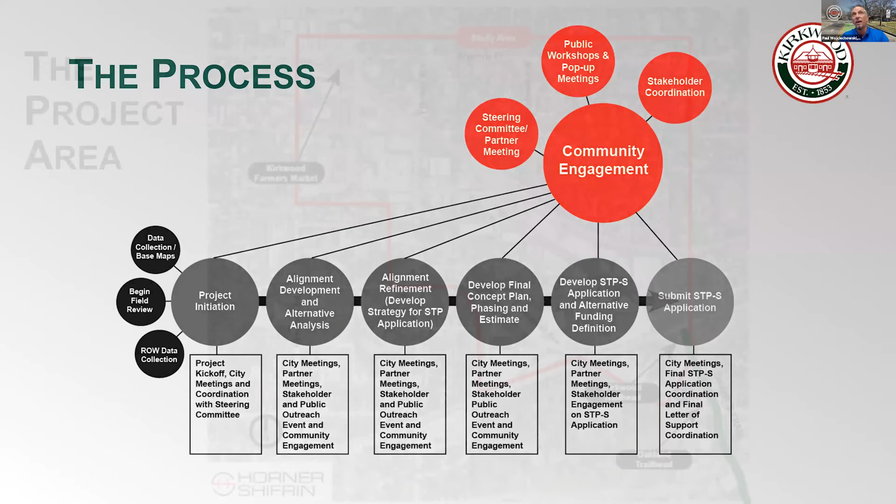So the project area is an area of influence, and it's a pretty big area. It goes all the way up just a little north of Argonne, and you'll see this on the map tool when you open it. I encourage you to leave your comments there—it's really easy to use.

As you can see, it's a little wider down by the Kirkwood Trailhead, and then it funnels into downtown Kirkwood, the farmers market, and the train station. So there are a lot of choices through this study area. We showed it big enough to show all the possible areas and allow people to comment.

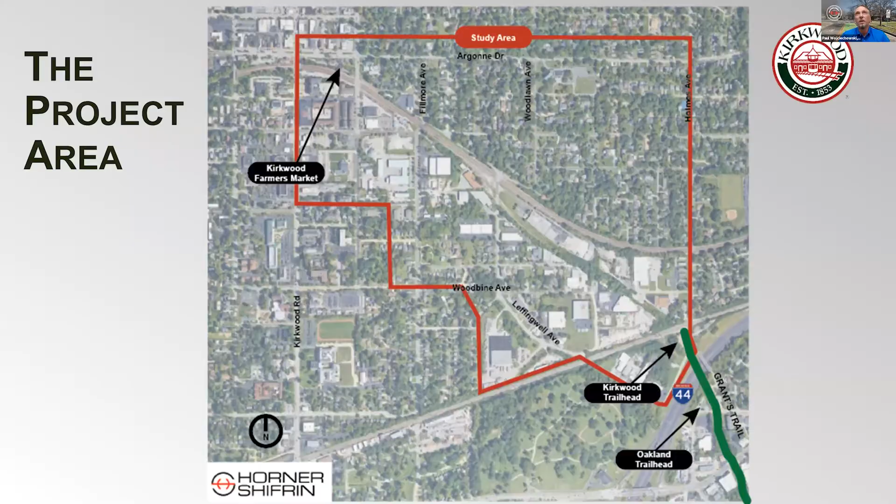So there are several challenges in this project: crossing two railroads. The Burlington Northern Railroad is on the southern end, right at the Kirkwood Trailhead. The railroad up by the train station and farmers market is the Union Pacific Railroad. Those are two challenging aspects.

Creating a plan that's of high quality in a constrained space to provide really good connectivity, a safe environment for all users, and really support economic enhancement in the city of Kirkwood. Funding the improvements is also a challenge, and it's an opportunity.

We're going to incorporate application considerations in the plan. So we're looking at that application when we're analyzing things and collecting information, to make sure that when we go to the funding stage, we've got our i's dotted and t's crossed to provide a really good application. Thinking about that now sets us up really well, but it is a challenge.

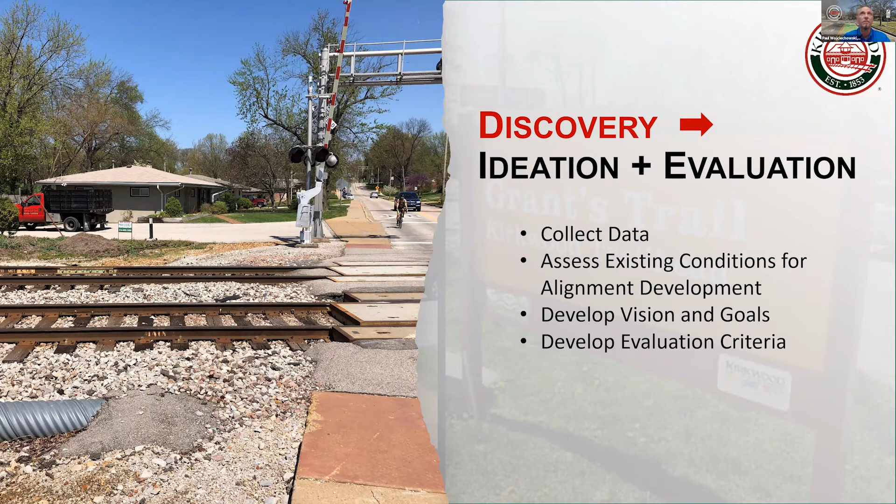Existing conditions: average daily traffic is important at intersections. When we develop a trail alignment, we want to make sure it's not just the segments that are nice to ride on - we want to make sure that when people cross intersections, it's safe and secure for an all ages and abilities approach. This map shows in purple roadways with under 3,000 cars a day, and in green roadways above 3,000 cars a day. We use that cutoff to know which streets carry enough traffic that we need to watch the crossings on.

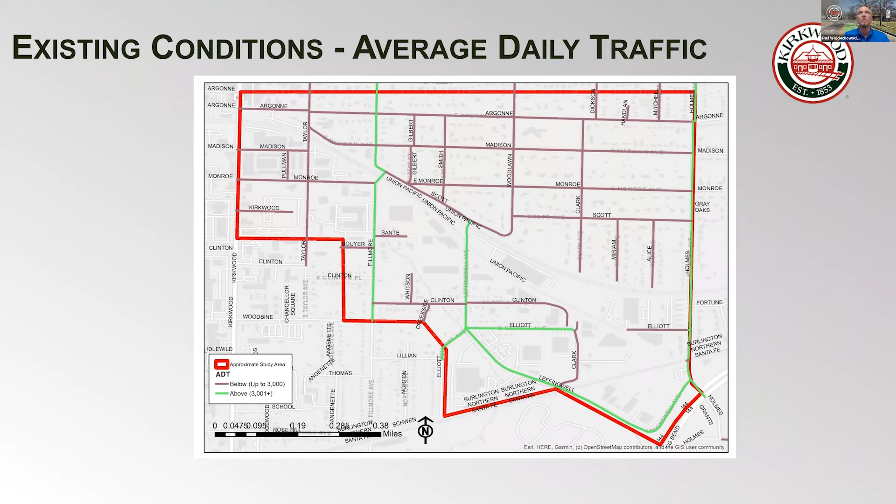Topography is important too. Of course, a rail line is built on a pretty minimal grade for the trains, but there are other parts we'll have to be concerned with. One of the goals we've established is to make sure the grades are appropriate for all ages and abilities, so we're going to look at the grades of the path or the alternative we come up with.

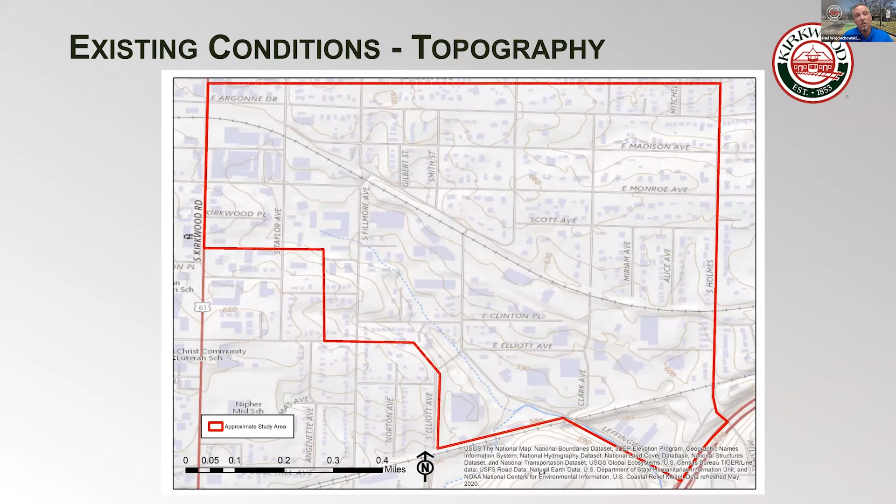Property ownership - the yellow areas on this map are railroad-owned properties, some active, some not so active. The city properties are in blue. One of the key things is to use as much public right-of-way as possible. The railroad rights-of-way are definitely a challenge - I'm not going to shy away from that - but we need to know where they are and how wide they are, because they're actually wider than most people think, and I've talked about that quite a bit with property owners over the last couple of weeks. So we're going to try to use as much public right-of-way as possible to make it cost-effective and minimize impacts.

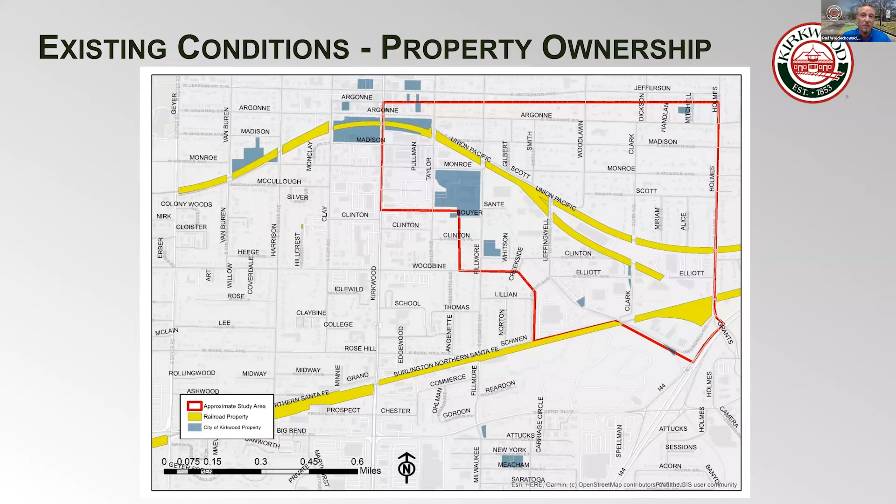We looked at crashes, much like your Vision Zero initiative. Knowing where those crashes are is really important. This map shows specifically in the study area bicycle and pedestrian involved crashes between 2011 and 2021, the last 10 years. We've got a couple of hotspots, Elliott and Leffingwell. Those red dots are the crashes that involved personal injury - we've got 3 of those. So we're going to be cognizant of those locations, especially to make sure we address any root causes of issues there.

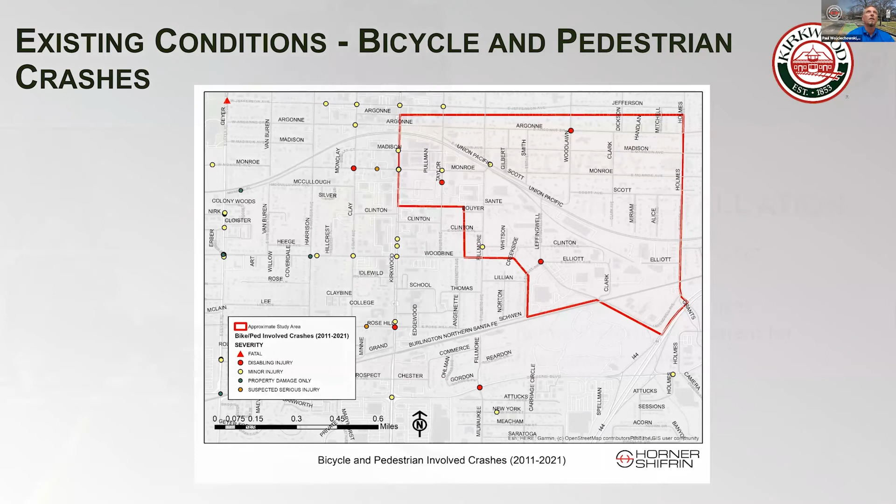So what comes after this data collection period is ideation and evaluation. Coming up with alternative choices, screen alignments, because we're going to have a lot of choices here, down to a reasonable set of alternatives and alignments, and then refine those for the final conceptual plan.

So railroad and property owner coordination. This is really important in just the ideation and development of alignment alternatives. By engaging adjacent property owners and owners in the area, as well as the railroad, it really gives us things to think about when we develop alignments, so that we're not just throwing alignments out there at will.

We have to identify the right contacts at the railroad agencies, as well as the property owners. We have to detail what we ask at the right time. We have to gain agreement on what property owners and the railroad are willing to work together on along the right-of-way. And then we want to consider what type of design details are needed to create a win-win situation.

All that kind of brings us to alignment development. And when we're thinking of alignment development on this project, since it could be a little cumbersome and a big item to chew, we're breaking this off into 4 segments in general.

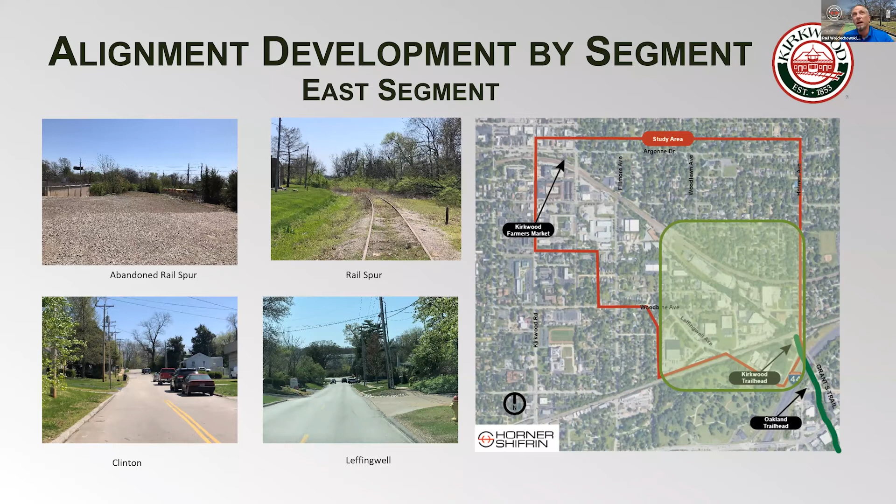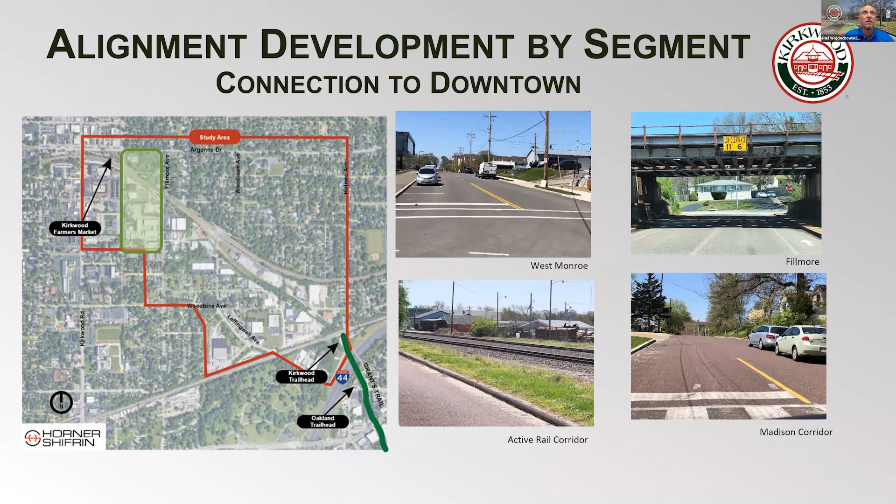The middle segment runs from about Leffingwell to Fillmore, so again there's going to be likely 3 to 4 choices in this area. The connection to downtown, again, there's several choices here, and we will document those. And then we have the Argonne segment to get over to the existing train station.

So when I say different choices in each segment, we don't want a roadblock to come up that stalls the whole alignment. So we will be piecing together these options in each of these segments and put together the best option, or it could be an interim option that builds to an ultimate option at some point in the future. If something's going to take a little bit more time, we want to make sure that we accommodate that ultimate preferred choice.

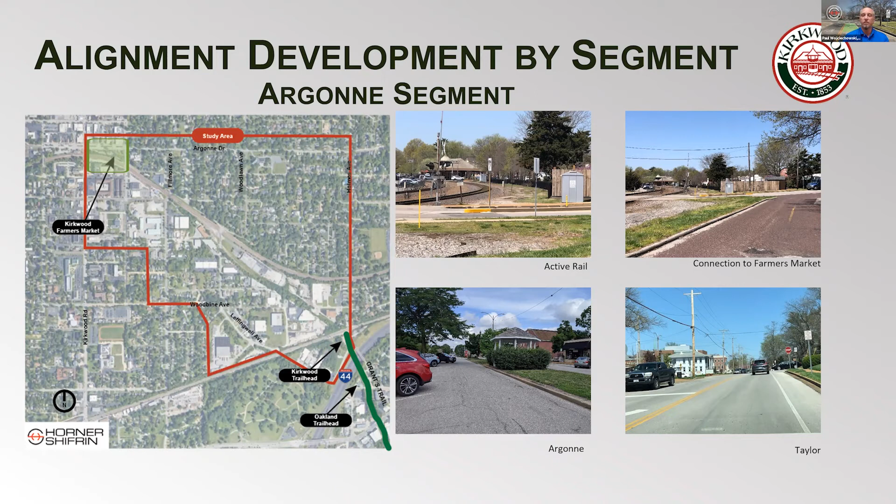So when we evaluate alignments, we're going to look at qualitative measures, quantitative criteria. We're going to address community concerns that you tell us about on the map tool and through the surveys. We're going to assess the opportunities of each of these alignments that we look at, and we want to allow for the best option to rise to the top, but not compromise the vision.

So for example, if one segment has a low cost option, and cost is maybe one evaluation criteria, we don't want cost to drive the whole story in the choice of that option. That is one element of a choice in an area. So we want really the best options to rise to the top and really hold on to that ultimate vision of what we want this trail connection to achieve.

So after we screen it, we get down to a preferred alternative. We want to work that alternative and develop a final concept, refining it with discussions with property owners, the railroad, and others to really get at a final conceptual plan that we look to move forward. We want to identify the phasing, if there's phases involved in the preferred option, and then prepare a detailed cost estimate for the preferred plan.

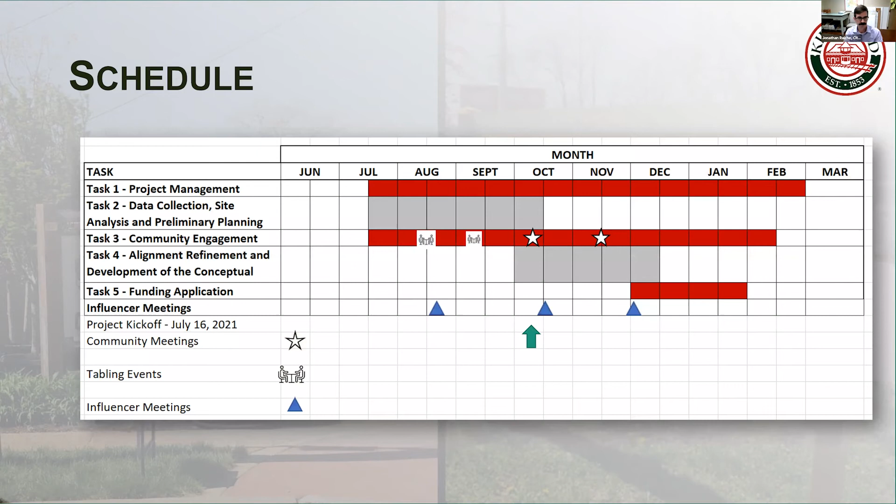Yeah, that's a great question, and one we have definitely heard. As Paul made clear, at this point in the process, goal number 2 that was shown there is being proposed and we want feedback on it. I will also refer people to the community survey available on our website, which we're still collecting input on. Paul said his team is going to start doing the actual alignments to get the choices together to come back to the public here later in November. But still, for the next week till October 19th, we have an open community survey and an interactive mapping tool that people can comment on, so we can incorporate those comments to come up with the alternative routes.

So back to the question. One of the overarching goals that has surfaced with this project is to provide a comfortable and safe connection. So ideally, in the hierarchy of trails, a separated multi-use path is kind of the gold standard, right? That's what the project will aspire to whenever possible. But as Paul went through some of those challenges, and I think this is why the question is asked, it wouldn't just be adding a bike lane. We're talking about pedestrian and bicycle facilities.

So there may be, because of constraints in the project, a time when it's a combination of a sidewalk and then a safer facility. It could be a bike lane. There's all sorts of treatments. Could be a protected bike lane. It could be a number of things. Those are all the details that will come out later. But as far as going through a residential area, if it needs to, as Paul also mentioned, one of the biggest opportunities we have is working through the existing city right-of-way.

Most street right-of-ways are 60 feet wide in Kirkwood. And the streets may be as narrow as 26 feet wide, so there's always more public right-of-way than pavement. In some cases, that might give us enough to expand a sidewalk from 4 feet to 8 feet or 12 feet and make it into a multi-use trail. But those are all the details we're starting that process now. First, we want input about where people will be most comfortable, what their ideas are, and then we'll come back with the details.

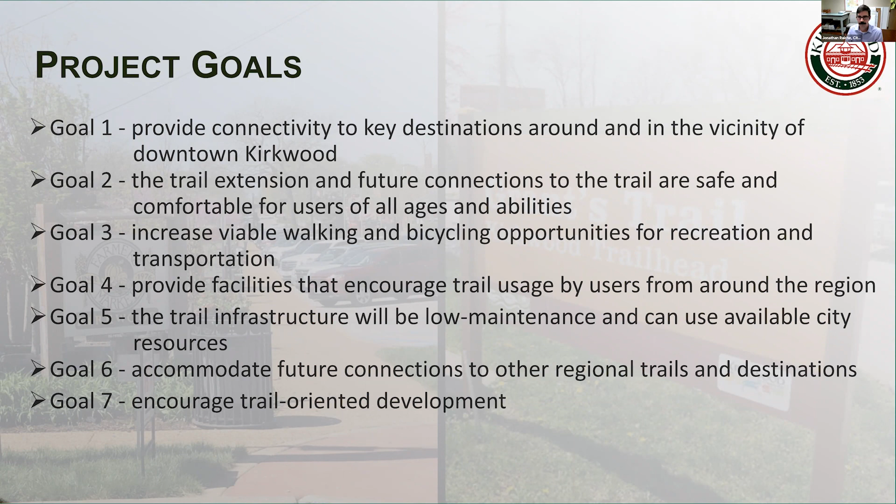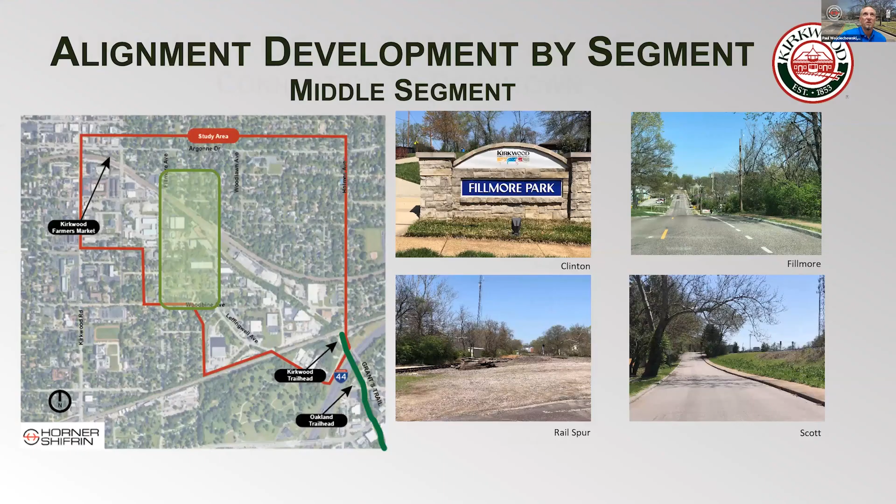We're coming up a little before 7 o'clock, and those are all the questions that we received in the question and answer box. I think we did have a couple slides to follow up with. Is that right? Yes, okay. Beth is going to talk about how you can communicate with us and provide input.